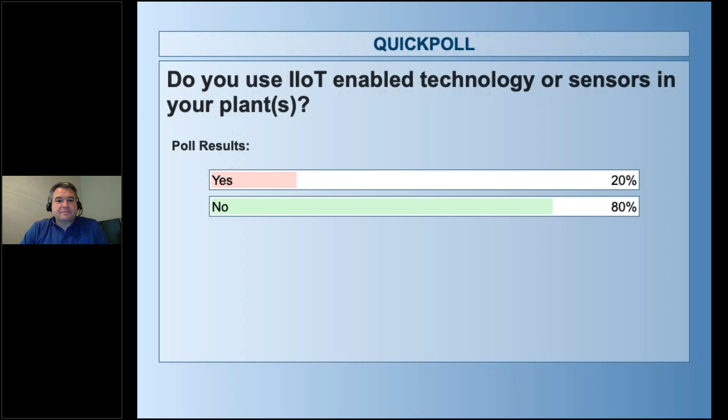All right, that's really not surprising. What may surprise you is the amount of sensor technology that's actually in the market. What we see a lot of is that there's sensors out in the field that are not being used, and we'll talk some more about why we believe that is and how we may be able to improve that. But there's sensors on everything, whether it be flow and level, speed, pressure indications.

There are sensors that measure vibration and sound, stress, strain. There's positioning sensors. There's literally sensors on everything that you can imagine. And some of that information is being streamed into our operating systems. We're able to bring that into a DCS and trend values, make decisions with that information. But there's a lot of sensors out there that are even

visual sensors on the equipment, and they may light up, indicating the health of an asset being red or green. What I see a lot of, especially with vibration sensors and such, is that people tend to turn those off because at night it looks like a Christmas tree, and then the phones ring because something is red and someone has a question. So I can see why there's such a large gap from actually using sensors. But on the other hand, that's a good reason to remind ourselves of the basic tests that we can do to evaluate the health of an asset in the field.

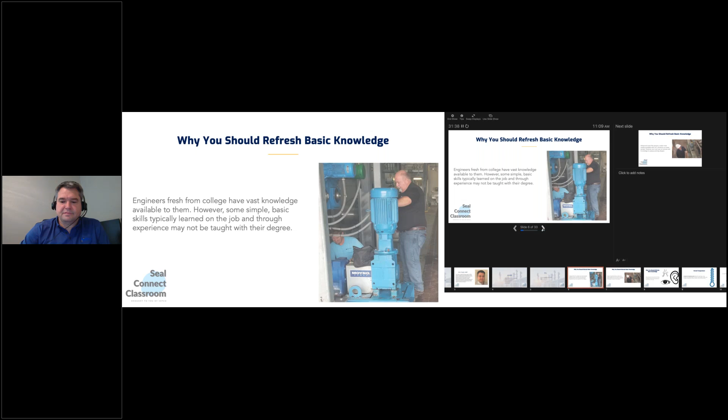One of the things that, let me see, I'm still not seeing, Lori. I'm still not being able to move. Okay, there we go.

So advanced sensors: with sensor technology, the ability to measure an equipment vibration or temperature has become more readily available, and sensors are very focused on a single point. And so bringing that information into a larger analysis using a tool to be able to organize that information, because a sensor is only as smart as what we tell it. The sensor is giving us a value that can be useful, but in the context of all of the other information, that's where you can end up with information overload.

You can bring in too much information, and all of a sudden you find yourself showing up for work and everything is in alarm. And if everything is in alarm and everything is requiring attention, it overloads the system and ultimately can hide real problems in the weeds of all of the false positives. And so using the sensors and using our own senses, looking at a system, is where true value can be found.

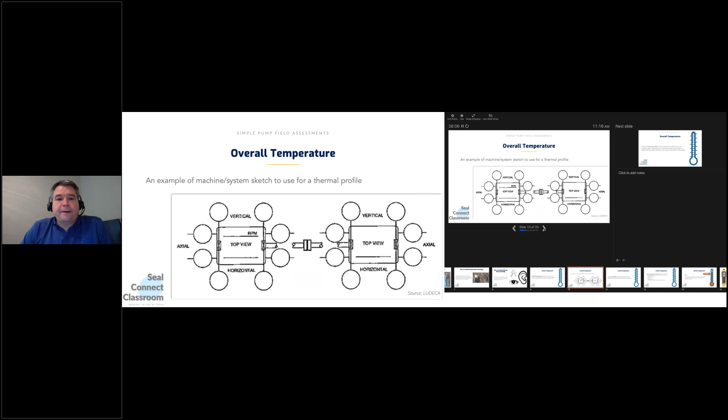So overall temperature and thermal profiles can help us compare like machines. And really, one of the things that I always stress is that I grew up on Sesame Street, and so I always like to look at what is not the same here, what looks different, comparing other machines that are alike in kind, looking at what is changing, the round peg in the square hole kind of thing. Just simple stuff that we learned prior to grade school. The stuff that we literally learned on Sesame Street is exactly what we need to simplify what we're looking at, what is actually going on, stepping back and using just our basic senses.

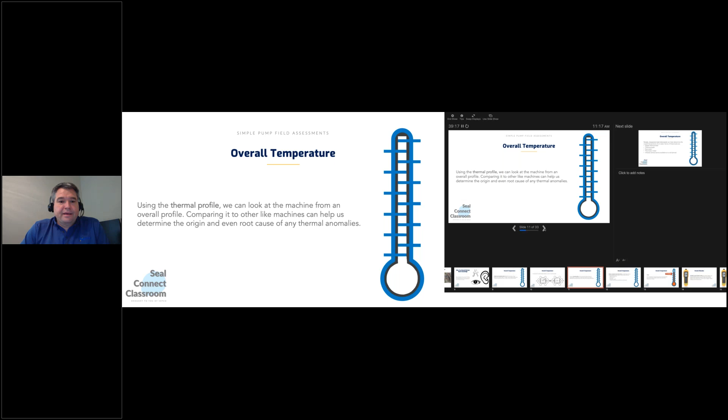Taking an overall temperature is another way to do that. You could use your hand just to feel around, and you can literally feel a machine and determine where a source of heat is coming from. But an overall temperature helps you to quantify that in a way that's useful, and it's actually repeatable. So for overall temperatures, there's tons of tools that we can use, anything from our hand to digital thermometers, thermocouples, pyrometers, and all the way to infrared cameras.

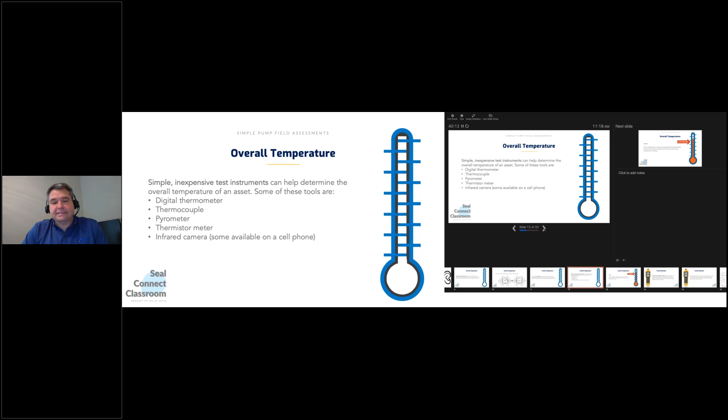And honestly, the technology has gotten to the point where you can buy some of the lower end thermal cameras with simple detectors that are 120 by 80 or something that's low resolution, but it still gives you that visual, just like if you were creating the thermal bubble plot map. The infrared camera is able to actually color that for you and create a visual for the eye to see where temperature is radiating from.

And I always start with temperature because that is the most basic element of reliability. When things that are rotating and moving start to go bad, it starts in the ultrasonic realm, where parts are starting to rub together, where I have a stationary and a rotating component that are now touching. Two things are going to happen.

First, I'm going to get friction, which is going to create some ultrasonic sounds that can be detected using ultrasonic instruments. Early on, they're not so much detectable by our human ear. That's limited to the frequency range below 20,000 hertz. But with an ultrasonic instrument, we can amplify those sounds.

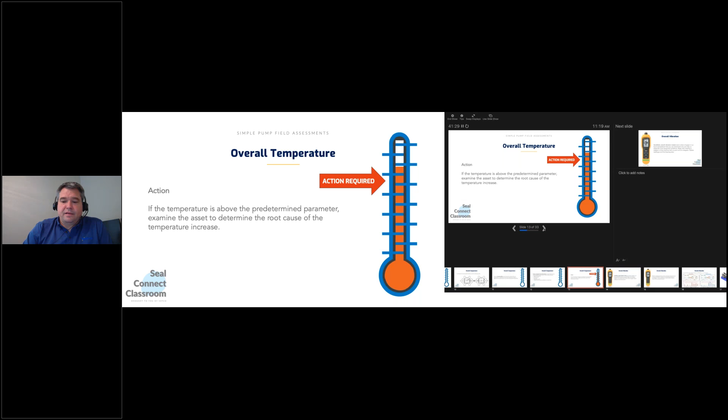Now, what happens next? Friction leads to heat, which can be detected with these instruments. And so using thermal instruments is a very low cost, inexpensive way to get early detection of the health of our equipment. So the next one is vibration.

So what happens next if two components are starting to contact and we have that ultrasonic element that's starting to generate frequencies that can be detected and even trended? There's ultrasonic instruments that we didn't include in this presentation, but it's a precursor of vibration. So when you think about something that's rubbing, I have a stationary and I have something that's moving back and forth, that is creating sound. There's low cost instruments that we can use to contact and detect an overall value that is an amplitude value that can be set just like the temperature that we talked about.

You can have a go/no-go where you're looking at decibels and say within this decibel range, if it exceeds 130 or 140, whatever the decibel is that you're trying to trend, you can have a trigger point that is based off of using the Sesame Street values. What is the average for that machinery type? But temperature will start to increase as components start to rub together.

Well, eventually, what will happen is you will lose clearances inside of machines. So bearings, different gears, could be impellers, whatever is rubbing that it was not designed to rub. These components, stationary and rotating components, are supposed to be separated. And if something happens and they start to contact, it will over time transition from ultrasonic through temperature to finding its own clearance again. When that happens, then you're starting to move into the lower frequency realm where our vibration sensors start to pick up the problem.

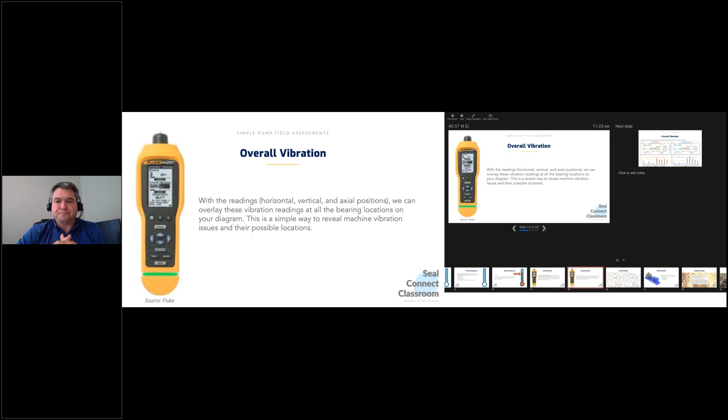So trying to determine whether it's coming from the vertical direction up and down, the horizontal directions on the machines relative to the bolting, the foundation, and then the axial positions in line with the shafts. Those are all giving us information about what's going on with the machine, and being able to diagram that is something that is useful. So the next slide is actually referring to the handout that we have.

One of the things about vibration analysis. So when we take out a simple overall vibration tool and we start to measure the machine, if everything was cleared out and you just wrote down the values on the bubble diagram, you're talking about changes in vibration that could be anything, let's say on the velocity side, because most of these instruments will give you a velocity reading in inches per second, and then it will also give you an acceleration value in G's.

But rotating looseness, stationary foundational looseness, while on the other side, the G's reading that shows up in acceleration is looking more at impacting, rubbing, flow related turbulence and such like that. So if I just had a blank canvas and I started writing in values, it's hard for us to visualize what we're looking at, especially to the untrained eye or somebody who's not looking at these values constantly.

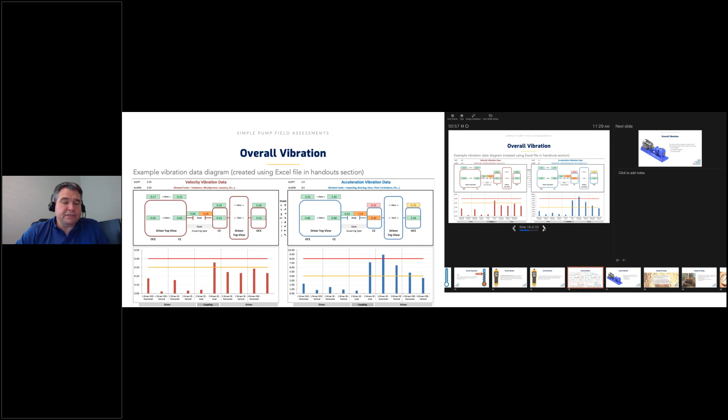So simple tool. It can be used for vibration. It can be used for ultrasound. It could be used for temperature. So that's in the handout section, and I just found that to be useful. So it's something we created just to help us evaluate condition. You could simply take a picture of the machine, and so overall vibration.

Of course, I think where humans have the advantage, sensors are only as smart as what we tell them, and it's giving us information that's very directional. So, for instance, with the vibration sensors, if I measure vibration in a vertical axis, I'm only receiving what that sensor is seeing in that axis. So the machine is likely moving in a circular pattern, but the sensor's only seeing what I tell it, or what it can within its limited scope.

And also sensors could be limited. For instance, the sensor could be overloaded, may not be sampling at the right frequency, or it could be something where the machine is actually limited in its ability to move, and so a sensor is showing you a rub or something in that regard. Those are all useful points of information, but stepping back and looking at the machine is something that is a challenge for us to always keep in mind.

In today's operating world, we have the ability to stream information into our offices. And so we're able to see in the control rooms trending values for vibration and temperature and flow and pressure, and forget that really walking out to the machine can give us the answer to what is going on.

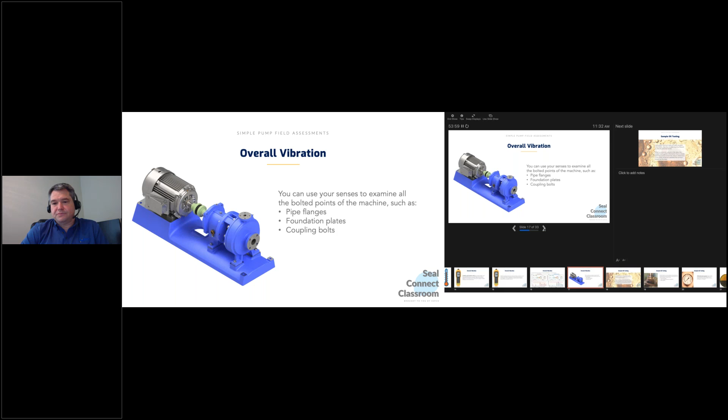So being able to walk out and use our other human senses, we get a better systems view of what's going on. So that's vibration, and the next one is oil. The oil and lubricants are the lifeblood of the machine, and there's a ton of valuable information that can come from looking at oil samples. So that data has to be filtered to make it useful. Anomalies can happen, and really pulling together information from the field can help us determine whether it's valid data or not. And so we'll dive deeper into that.

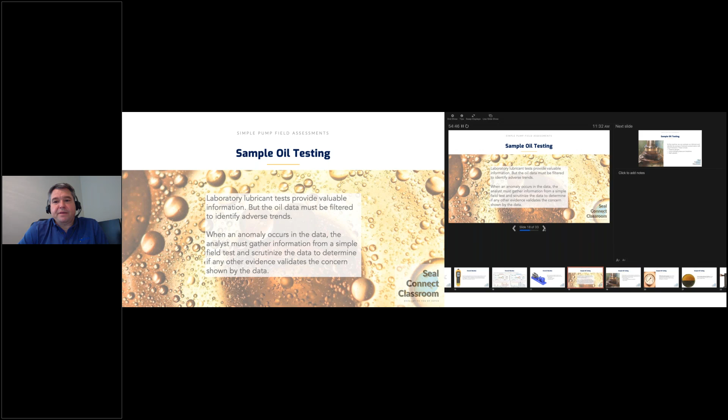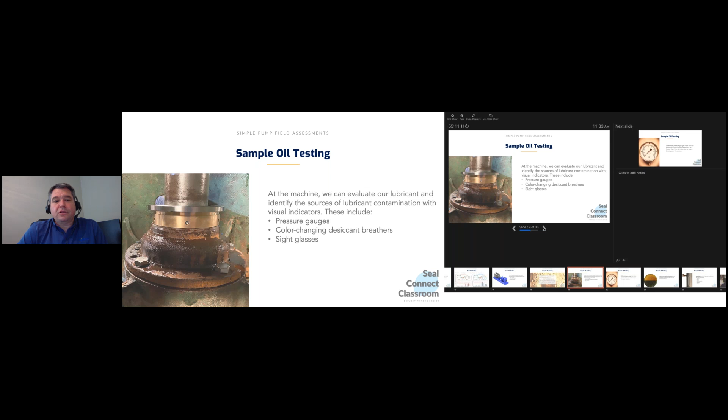With oil sampling at the machine, when we take a fluid sample, an oil sample, there's pressure gauges, there's color-changing desiccant breathers, there's sight glasses, there's other visual indicators surrounding the machinery and the lubricant that give us clues as to what is actually going on with the lubricant.

Oil sampling is great, but differential pressure gauges are something that we need to remember. I find this is one of the areas that is least used. There's pressure gauges all over machinery, and yet we have not identified the operating context of those gauges. You'll find a lot of times the gauges are fouled or not working, and those are useful tools to determine whether, in a lubricant system, maybe you have a filter that's bypassing.

So it's one thing to take an oil sample and send it to a lab, and then come back and find that the oil was dirty, only to go back out in the field and find out that the filtration system is being bypassed because the filters were plugged. So using differential pressure gauges, looking at flow restrictions, or maybe there's a pump going bad; it could be a number of things causing the issue.

But one of the things that you may find with oil sampling is that we send off samples that are visually bad. We take a sample of oil, and you can see that it's oxidized, or that it's contaminated with water or particles floating around in the lubricant, and we still send those off to the lab versus stopping where we're at, using that visual information, looking at the system, and then correcting the problem.

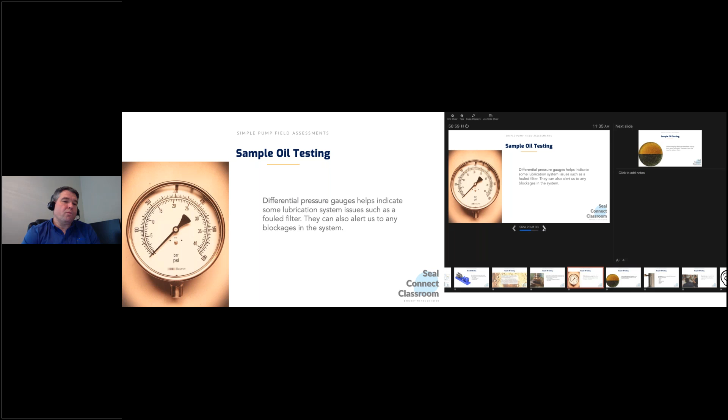So we want to continually remind ourselves that there's more advanced techniques that can be used in the field that do not cost us $40 or $50, or even more than that. I mean, a sample can be as much as $100 by the time we pull a sample, the handling of those samples coming and going, and the analysis of the data.

We're spending a lot of money on oil samples when sometimes a quick visual sample at the machine can give us everything that we needed to solve our problem.

Color changing desiccant breathers. This is another area that I think is often neglected. And if you walk out into your plants, I want you guys to take this challenge. Go out in the plant and look at pressure gauges, look at desiccant breathers, and just do a quick survey of one unit, one area, and find out how many gauges are there. Maybe do a count, and there's 50 gauges or 20 gauges, and maybe 20 or 30 desiccant breathers.

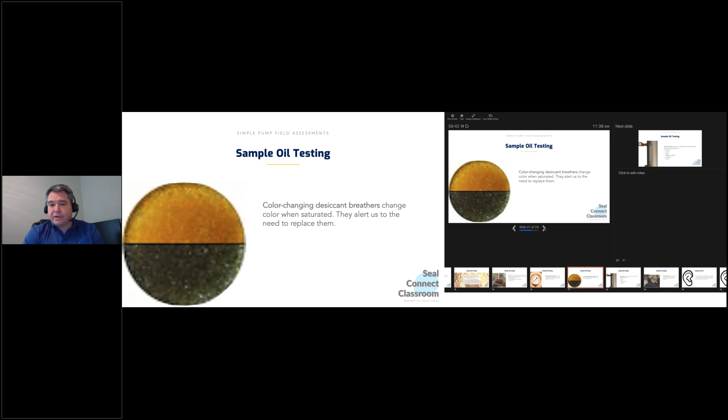Then document the current condition of those breathers, of those pressure gauges, of those filter systems, and I think you'd be surprised. It's often neglected. It's one of the most useful tools that we have, and honestly, the lubricant is the lifeblood of our machine. So we want to take care of that lubricant, which translates to improved reliability across the board. Protecting the lubricant is essential.

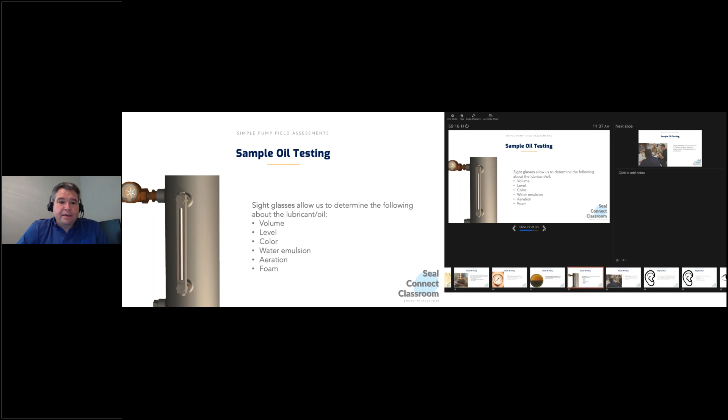The other thing would be sight glasses, level controls, looking for foam, aeration, water contaminants. Sight glasses is another one of those to add to your list. What is the condition of your sight glasses? Again, take a small sample, decide, and determine what is the health. And those are some of the simple things. That's the low hanging fruit that can be implemented today that can impact reliability immediately, and give you valuable information

about what's going on. Simple field tests before we send off an oil sample to do a 25 element analysis of what's in the oil, whether it's silica or iron or copper, how many particles are in the oil, what is the viscosity, the water contamination. Those are all things that can be done on a small scale in the field. So you're able to take a sample and look at separation of water.

Just take some time. If it's a machine that is not clear and bright, take a quick oil sample, let it settle out. Use a magnet. You can create filter patches. The technology for using magnification and being able to bring that up to a screen. I mean, for under $100, you can buy a microscope nowadays that can feed right into your computer. You can quantify sizes, shapes. You can start looking at what actual particles sub 40 micron are in your oil.

And really, when you hold up an oil sample and you look at it, the human eye can typically only see above 40 microns, which is about the size of a dot. If you took a pen and tried to make the smallest dot that you can make on a clean white piece of paper, that is roughly a good example of what we can visually see. So the particles that are below that, the 10 micron particles, the 6 micron particles, 3 micron particles, we can't see those without magnification.

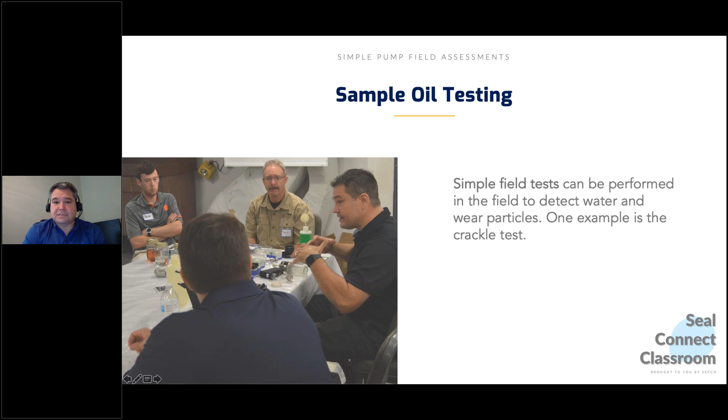So again, going out to the machine, looking at the system, deciding whether the information is valid or not, is where we really can come in and improve our analysis using simple tests. So outside of more of the instrument side of things, just using our ears, this is something that we really should focus on.

And when we're training new operations, maintenance, engineering, we really need to remember the simple techniques: using your ears, listening for abnormal noises. This really dips into the Sesame Street stuff, because what does not sound the same today from yesterday? Listening for modulating sounds coming from your equipment, whether it's the wah wah wah kind of stuff, or it could be a gravelly noise coming from cavitation, could be recirculation in a machine, could be rubbing. As things start to rub, they move from the ultrasonic realm down into the audible side.

And then there's the old school, putting a screwdriver to your ear and listening to the machine, using a stethoscope to listen to the machine. Those are things that are very useful, that we still need to focus on, because if we don't talk about this, people don't do it. We just lose it. We assume some things are getting passed down through tribal knowledge, and really in PMs we do need to talk about these. We need to go out and practice some of this stuff, and I believe that's an essential part of our training, our onboarding and continuing training for personnel.

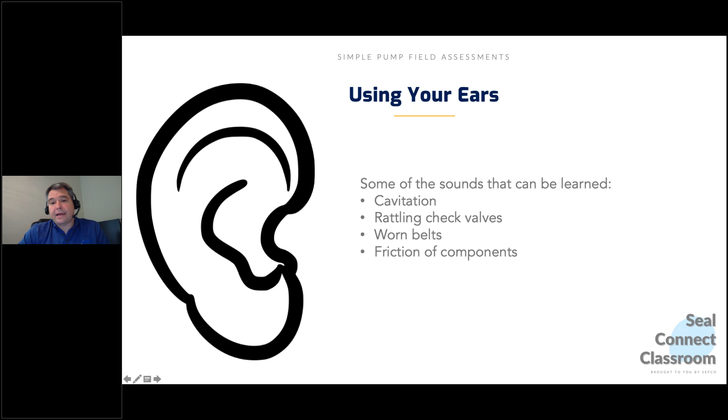So using your ears is a big part of it, but probably one of the best and most underutilized is our eyes. And so visual inspections, to me, are a cornerstone of equipment condition monitoring. Most everything has a visual clue. If you have sensors, it's still important to walk out. I talked about this briefly. If information is coming into the control room that says I have an anomaly in vibration or temperature, I need to go out and visually look at what's going on. Look at the entire system. Look at the driver, the driven, the transmission sources. Things like worn belts, you can hear that, you can see that.

Using strobe lights is another low cost, effective way to tune in to the rotating speeds of various components. It could be a drive shaft, or could be a shaft turning. Being able to tune that in to the actual rotating speed, then you can see clearly whether you have, say, a belt issue, something moving, something that's misaligned or worn, you can start seeing evidence of that. The low level stuff should be part of our 1 minute inspections. When we walk out and look at the oil levels or process fluids, looking for leaks, cracks, breaks in assets, vibrating piping, noting the base plate conditions. Those are all visual things that need to be included in our PM processes.

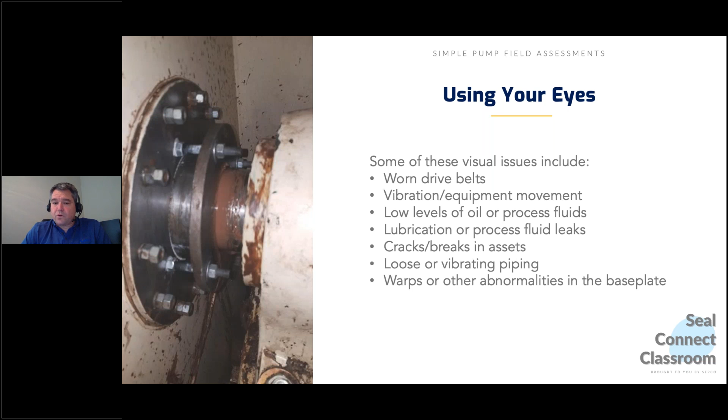If not, then there should be a follow-up work request that says that I was doing a PM of this particular asset, and there was an issue with the oil level. The sight gauge was not visual. It's corroded or stained and needs to be replaced. Those should turn into work orders in the system so that we maintain our processes.

So very essential. If all we do is spot problems and we never fix them, one of three things is going to happen. Either A, we had a predefined inspection and people just gave up on it because they felt like there was no value. B, we may find that there is no value. We may look and say that's being over PM'd. The go no go side of things needs to be adjusted. Maybe we are going to live with that for some particular asset. In those cases, we simply note that in our PM, saying this particular asset is known for these issues, and until we can resolve it, it's just understood.

But that's the clean way to get value out of your system, because people will either not follow the procedure because they don't believe in it, or B, they're going to adjust the procedure to something they do believe in, or C, you just didn't have a procedure, so people just make it up as they go. And you're going to find one of those three in your PM process.

So using your nose is another thing that's underutilized. Of course, if something's smoking or burning, people tend to respond to that. But there's other smells that can be used even when you take an oil sample. You can look visually for oxidation. You can smell oxidation. You can smell whether a lubricant has been contaminated with another foreign substance. It may be a different lubricant. It may be that you smell sulfur because someone poured a gear oil in a pump, or vice versa. You may have the smell of oxidation or mixing of diesel or whatever process fluid in the lubricant.

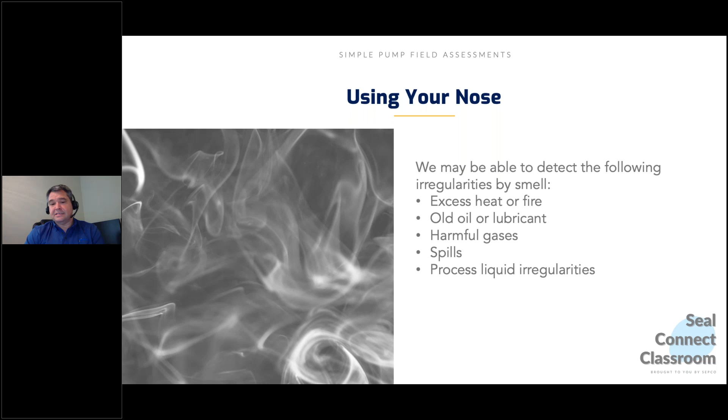So smelling burning belts, smell is something that is very useful and should not be neglected. I think that's something we should talk about. Simple tests that should be passed on purposefully versus just passed on through tribal knowledge of how a system should look, smell, sound like, and being able to detect those are things where I think we have an advantage on the human side of things. Now, for quantifying those, the other tools, vibration, temperature, ultrasound, oil analysis, are very useful. There are some objective measures that can be defined, but subjective stuff is just as valuable. So using your nose is another valuable asset.

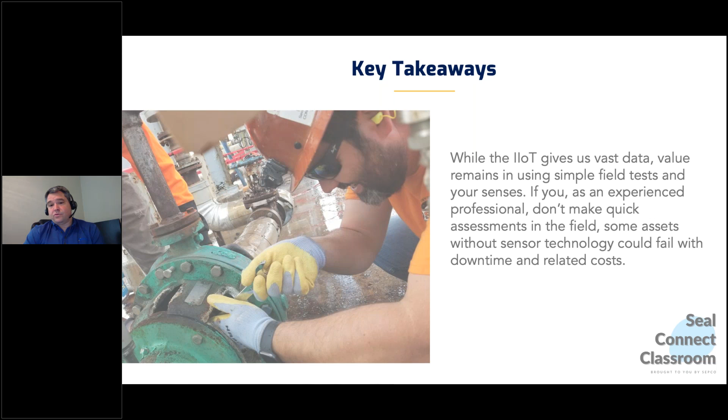And I think that brings us to the end. Key takeaways: using data and supplementing that with field tests and using our own senses is critical. So I hope we were able to remind everyone that observing oil levels, filters, simple gauges, using our simple tools, the inexpensive stuff, putting together toolkits for vibration, temperature, using stethoscopes and ultrasonic meters, those are low cost things that we can implement into our processes that add tremendous value.

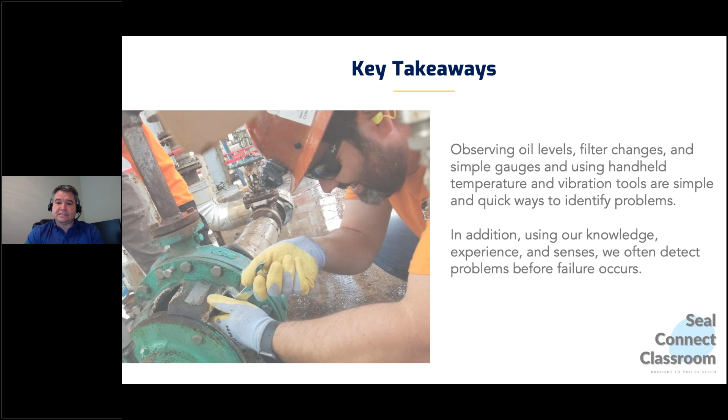And it really comes down to experience, guys. If we practice these things, if we are intentional about teaching and training people to observe the simple tests, I think it helps us to define a system approach. And ultimately, I think that's the key. From what I found so far in my career, the system is really important. And when we get narrowly focused on a single data point or a single value and forget to step back and look at the system, that's where I think we can make mistakes.

And a pencil, a piece of paper, those are all extremely valuable and useful. I'm hoping you guys can find some use with the Excel sheet. Maybe take that to another level. You can modify that and use that as needed, but I found that to be useful in the past. So glad to share that.